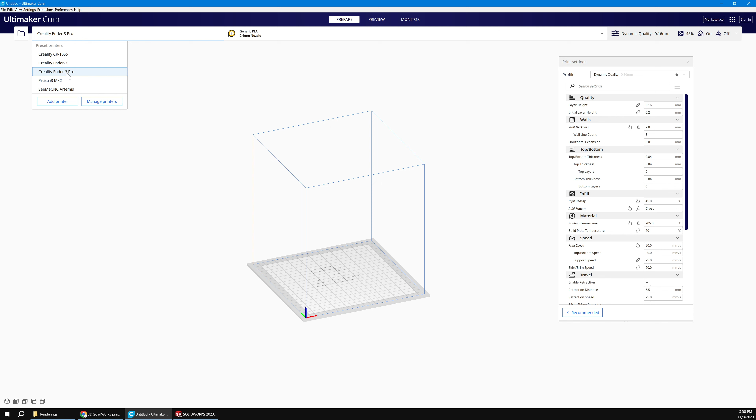What you can do is go and select, make sure you have the right printer, because as you can see here is my Ender 3 Pro, but then here's my Creality, and you can see there's a size difference. So you want to make sure you've got the right one selected.

Now over here you've got basically your profiles and everything that goes through with it. Super fine quality, 0.12, that will take the longest amount of time to print, because it prints the most amount of layers at the finest amount. So if we were to do something, I was to say 0.28, I'm just going to do a quick sketch here.

Imagine the thickest one, which is the fastest, is because it is laying down a thicker bead of plastic and layering it each time. Wherein if I go for the super fine quality, 0.12 millimeters, each bead is exactly that, so the gaps are smaller. You can kind of see here as a comparison, it does more layers, which allows it to give a smoother finish, as well as better details.

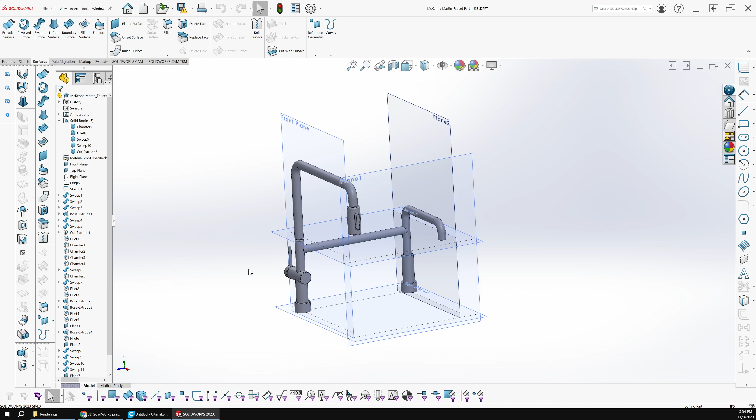Now what we're going to do is export this out. You need to export it as an STL file. So we're going to come here and go File, Save As, and we're going to go to STL. What that does is turn it into a mesh, and that's what Ultimaker needs, a surface or mesh file.

So we're just going to go in here, I'm going to go to Options. I want to make sure that when I export it, it's smooth. If I bring it in like this, a circle will be faceted when I print it, which is great if you just want to go quick, but we want a circle to be a circle. So we're going to go with a nice fine one.

Now in this model we have multiple bodies. So I can come in and go, where is it, I want to say I can either save all my components in a single file, and I'll show you what happens. So I'll do this, and we'll save it as a single file. There it tells me we've got it.

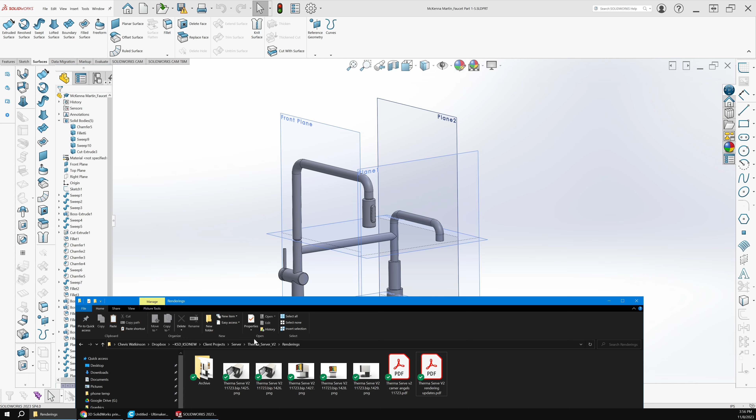Now if I come back here and go to my downloads, you'll see it saved out each individual piece. So we've got that now.

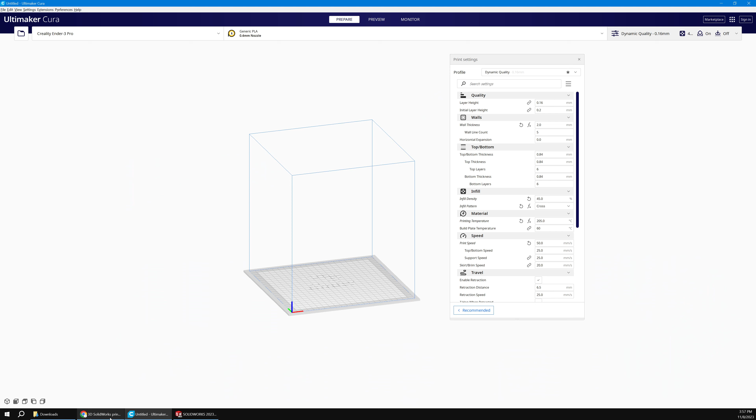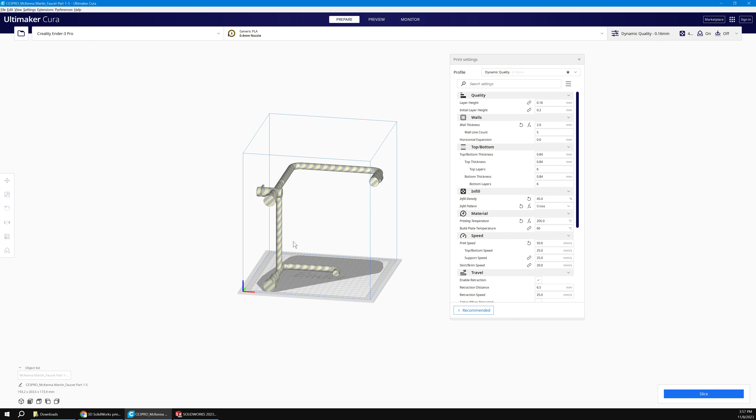So what we can now do is come into Cura, and we can just say open. We'll go to where these are. Now this is where it brought it in as one giant object. The problem is what you're seeing here is that it has these striped lines because it's telling you that it doesn't fit onto the print bed.

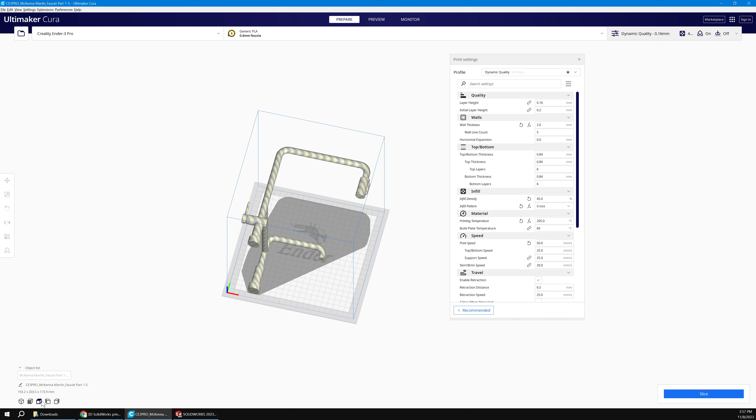Now that's not necessarily a bad thing. But you can see here it doesn't fit. Let's go to a side view. Plenty of room here. So what we want to do is take it and just select it.

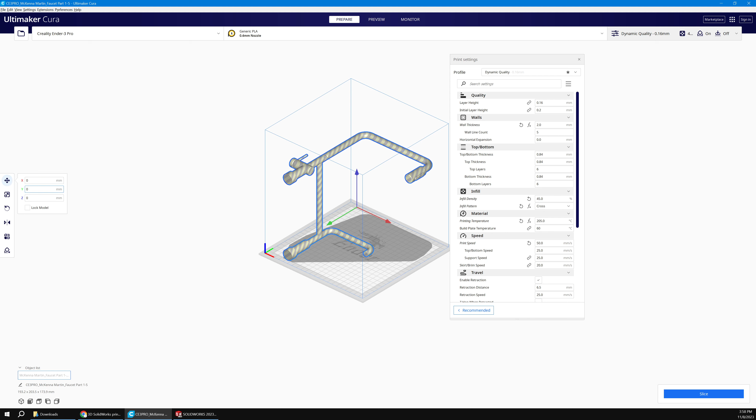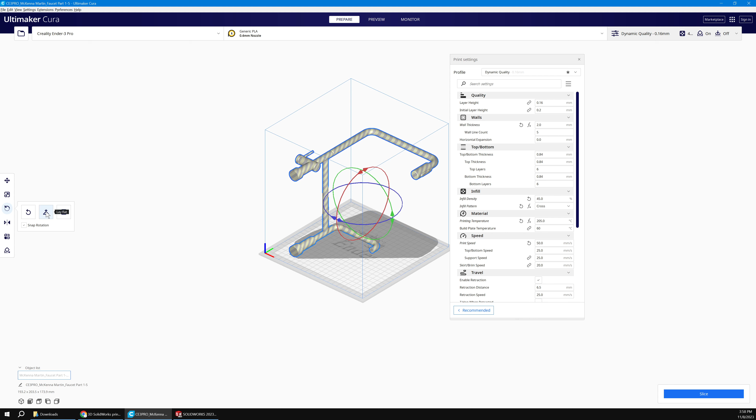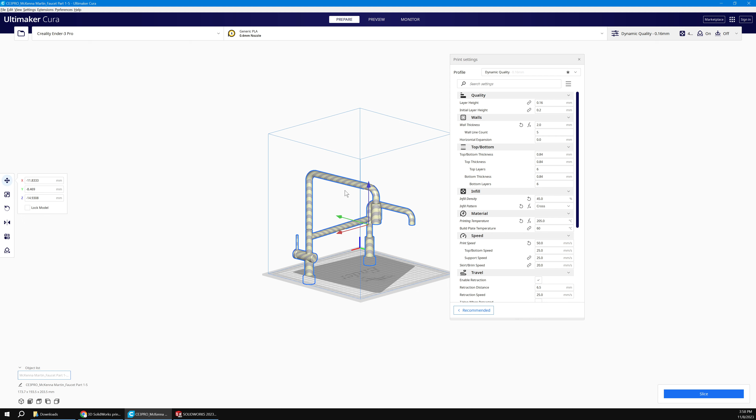Over on the left hand side we have a lot of different options. You can move it around and type in the numbers, or drag it around like this, or we can rotate it. For this we're going to go snap rotation, and I can reset it, grab these and rotate it, or say lay it flat on that face. So if we come in here and go 90 degrees... not quite sure.

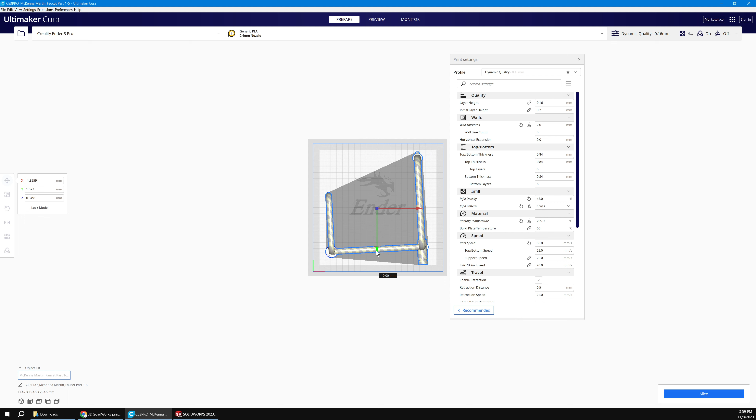There we go. So you can see by moving it around and positioning it, I got it in the right spot so that it fits all within the bed. And I know that because it's yellow.

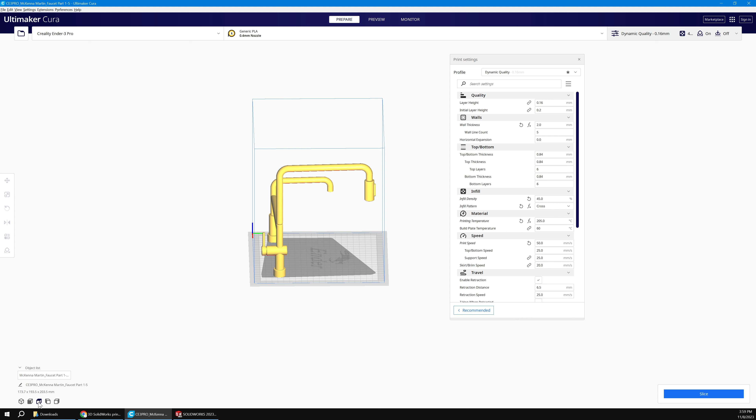Now, here is something to keep in mind when you're doing this and positioning things. You need to have what's called support structure. You can't 3D print something and just have it hanging in space like that. There's nothing for it to print on.

So you need to tell it, hey, let's have support structure. So that's where if we come down and we go to support structure, we want to make sure that we have it turned on.

You see here where I'm having it set is at 50 degrees. So anything that is greater than 50 degrees, I'm saying build support for it. So 90 degrees, obviously. If I was to do 50 degrees, the reason for that is because it's actually able to do it without support for 50 degrees.

If I come back and I go slice, what slicing does is it runs through and creates what's called the G code, which is the file that the 3D printer needs to read. So what this is doing now is going through and taking a look at everything to show what we've got.

Now let's look at this right now. We've got 9 hours, 9 days, 11 hours for this. Let's go to preview.

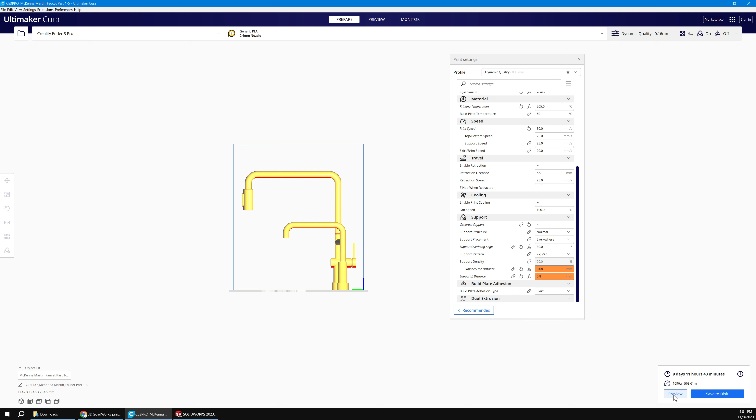There is this much support structure. There's more support structure here than the actual model. So it takes that much time.

Now, we can also come back and say, well, let's just do a standard quality. That's not a bad quality to go with, 0.2. Even 0.28 would be good, but just by doing that, we had 9 days.

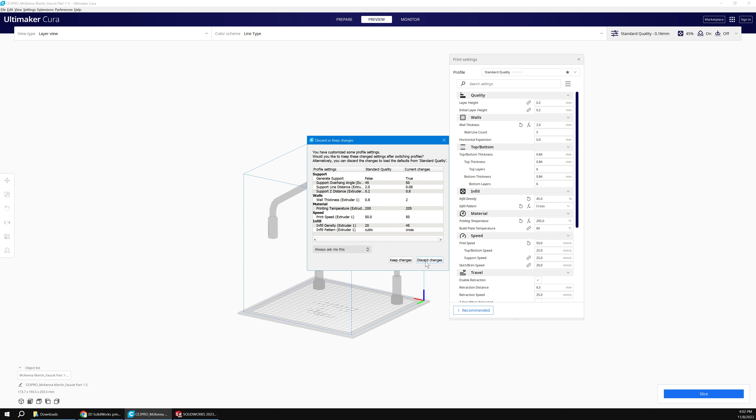Let's go with a slice. We went the wrong way. It went to 10 days. Well, that's just bizarre.

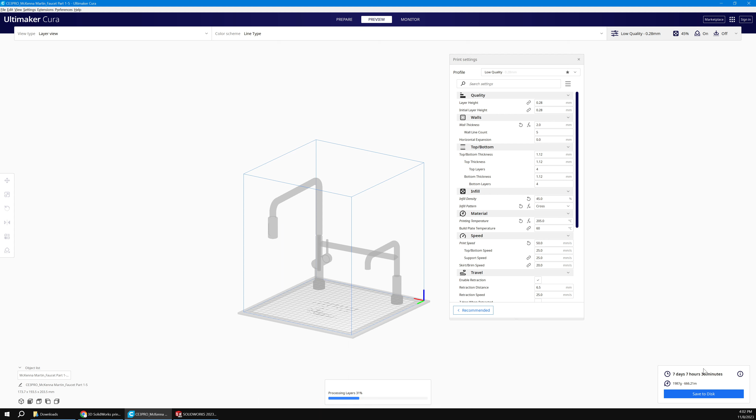Hold on, let's try it again. Okay, so now we're down to 7 days. And a large portion of that is still all this extra material in here.

So this is where we look at it and say, okay, what are the different ways to do it? Because even if this was a reasonable time, let's say 2 days, the chances that maybe halfway through something gets ruined is high. The longer that thing is running, the higher probability that something could go wrong.

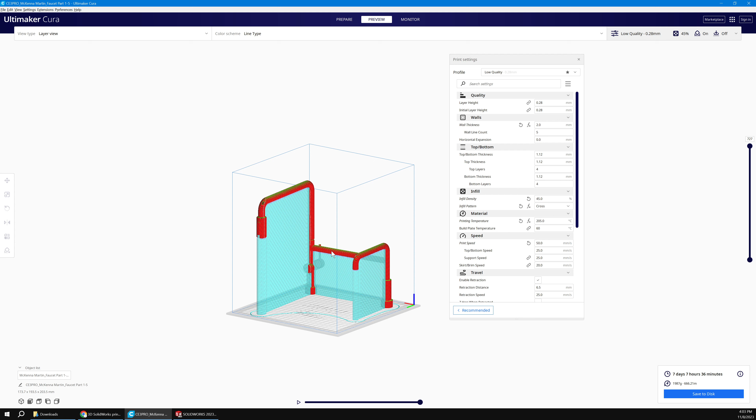So you want to be careful. So that's where you want to look at your model and say, okay, well, in this example, what can we do? What if, how high it is and how much it's printing?

What if we were to come and we're just going to come in here, I'm going to right click. Shoot, I'm not in. I wanted to be in. Okay, hold on.

Fusion 360 is really nice because you can just right click on a body and say export. No, it's not going to let me do that. I want to export just that. Okay, give me a second here.

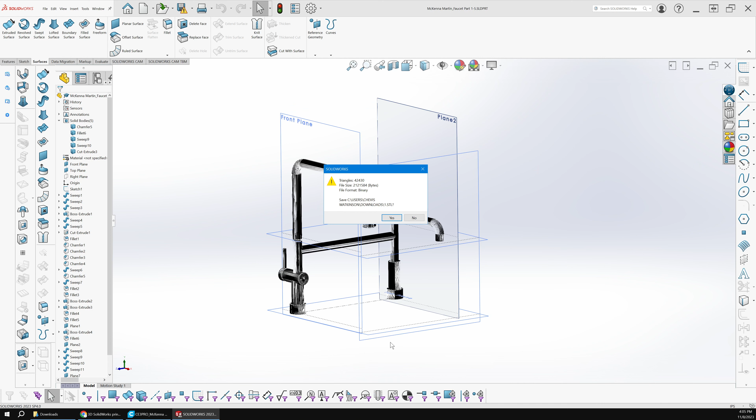Okay, give me a second here while I think, because it's been a while since I've done this. Okay, so I'm gonna cheat here. I want to get these all as individual components. So I'm going to just right click. I'm going to insert into new part. I'll give it a name. Come on.

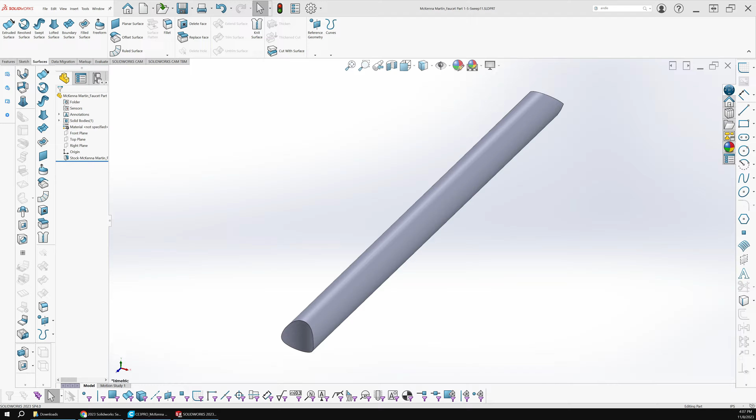Okay, so what I did is through SolidWorks, I went and let me just open it up. I went into the model, and for each one of these objects, I highlighted it, I right-clicked it, and I said insert into new part. What that did is it automatically inserted it in a new part. I was able to save it.

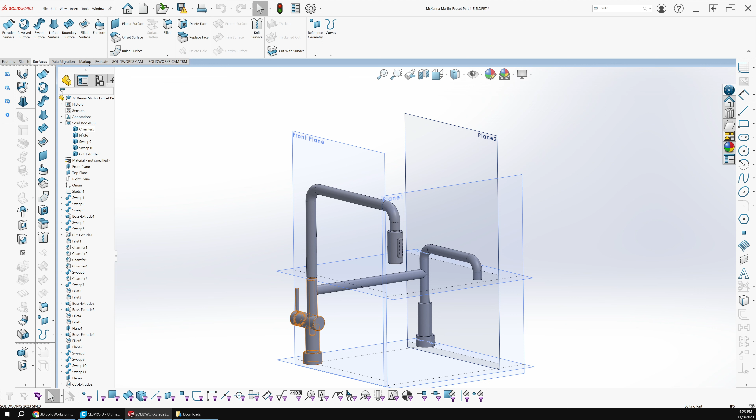And then I'm not sharing my screen. Let me share my screen. So let's go back again. We'll step back here a little bit. So because they're all solid bodies, I could come here, select it, right click, go insert into new part.

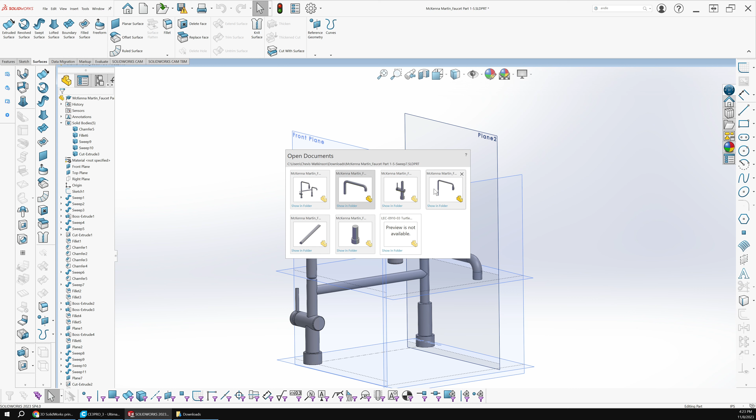What it does is it automatically opens up a new SolidWorks model window, puts it in here, and now we've got a new part. You can see here it says it's stock. What this allows me now to do is I can go in and save out just this one piece as an STL.

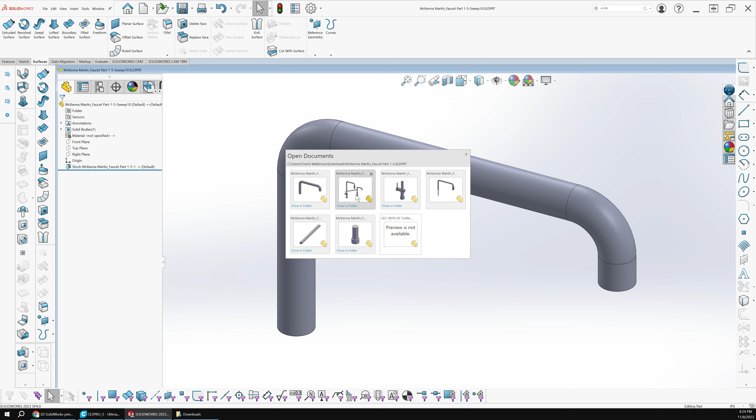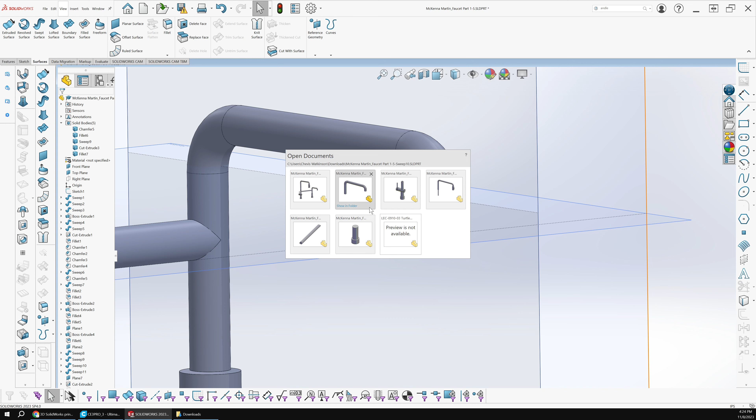Versus where I was struggling before with the workflow of trying to save out individual components within there. Now, the one thing though is if I come back to this model, and this is where when we start building assemblies, I'll show you a little bit more about it. But if I come in here and I edit this part, if I go to that part now, it updates. So there's a link.

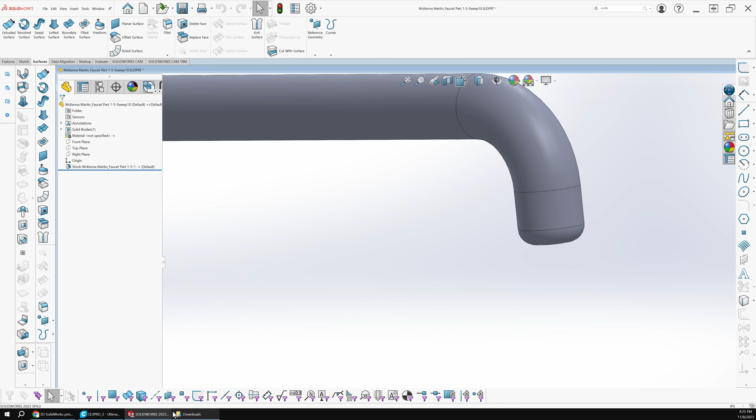Normally what I would then do is drag these all into their own assembly, but we're not going to worry about that for now. So what I then did is, I'm going to just delete all of these because I want to show you first.

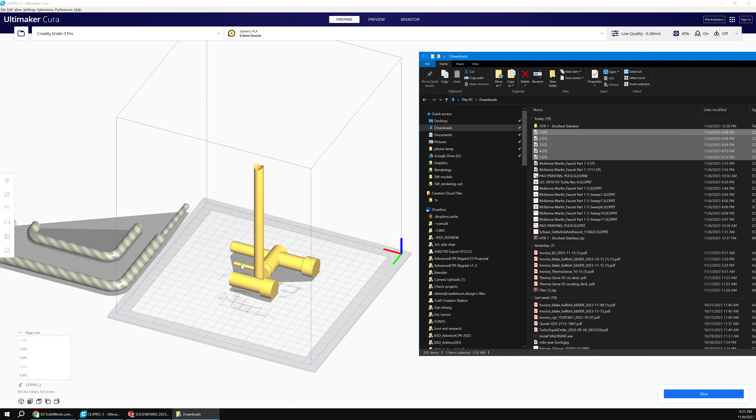What I then did is come in, and I've named them all STLs, just like I did before, and I can just drag and drop them all at once, and they'll go wherever they need to go. You can see these ones obviously can't be printed because they're off the bed, so I'm just going to drag and move them around until I get them to be highlighted yellow. And then same as this, we'll move this one to wherever it needs to be.

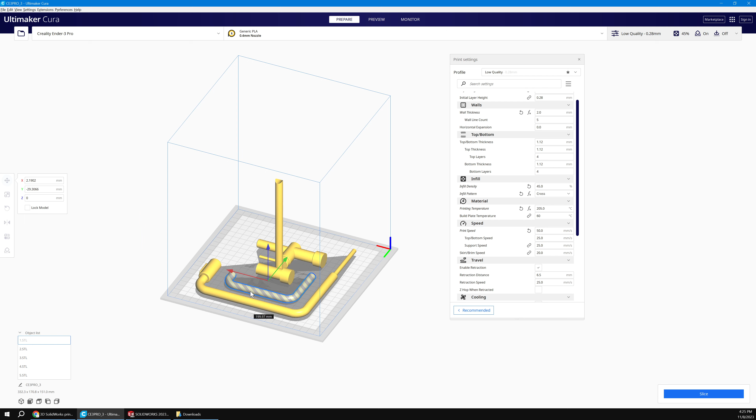So right now we've got everything laid in. That one's vertical for whatever reason. We could rotate that too.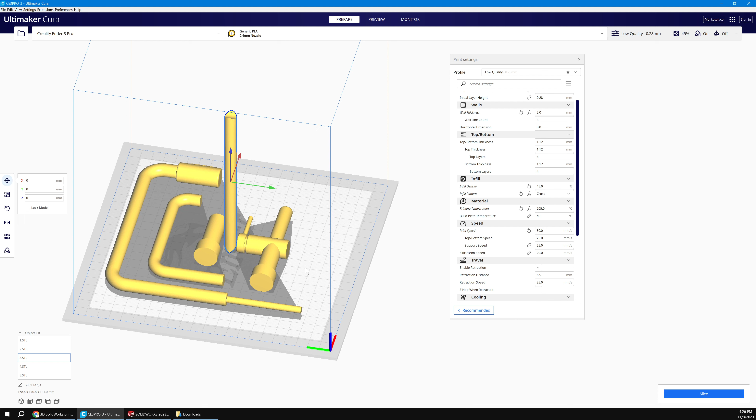Now, here's something for some of your models when you're doing it. The most precise way for it to create a circle is from a top-down view, because it's going to draw that circle and it can go in that rotation, versus doing a circle in this orientation. So from a top view, the circle looks like that.

From an orientation like this, give me a second while I sketch that out. It does a step thing because the 3D printer goes a pass, and then does another pass. So it's not as tight of a tolerance, not as smooth either. I don't think it's going to be an issue for this.

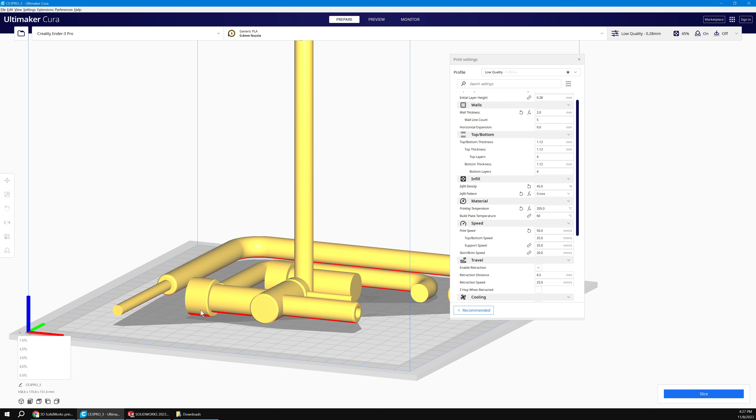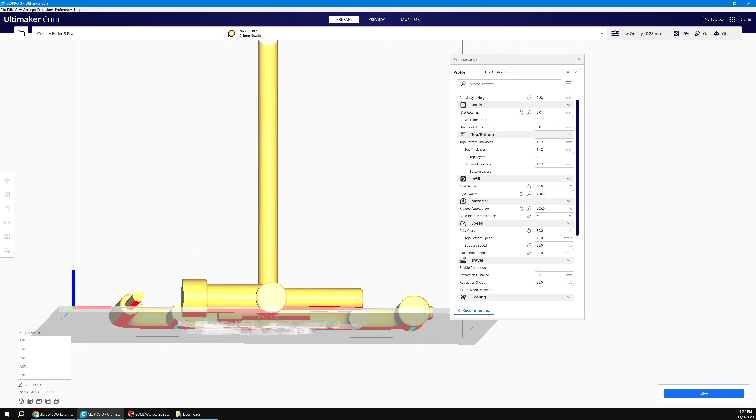But you can see here, let's just look at this orientation. We've still got the exact same amount of mass. We can now rotate things so that they don't use or don't need as much support structure. I still have them slightly raised off the bed. I like to do that because it makes it further cleaner on the edge.

But if I come in now and I go slice, and I haven't really changed anything, it's still low quality, whatever, initial layer height, we're down to 12 hours now. So you can see by removing all that extra filament, we saved a lot of time.

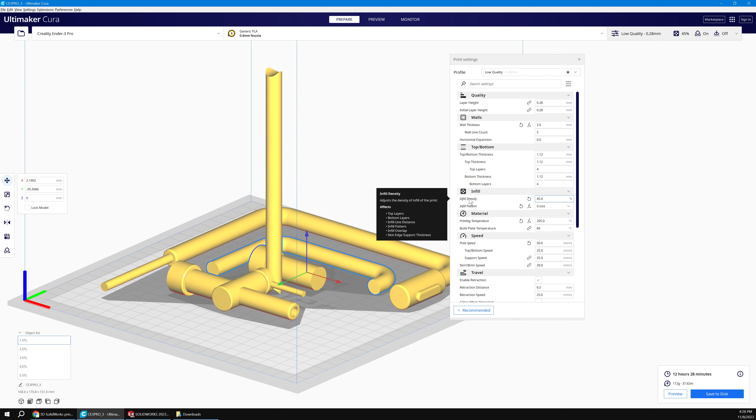Now, I can even go more so if I sit there and say, okay, these are all set to my presettings. Infill. If I come in and I go preview, infill is how much of that internal structure. So this here is a solid bar. And you can see it's put infill in there so that it's not a pure solid bar.

It's only 45% fill. If I came back and said I want that to be 100% for everything, that's the thing, I can't pick one piece and only have it at 50% infill. It's everything on that bed. But here you can see now it's much more solid. But you've added 2 hours to it. So there's give and take.

This is a much stronger piece. It's not going to be as delicate. You can come back and say, you know what, I would be fine with a 30% infill because I'm going to be there to micromanage it and make sure no one touches it.

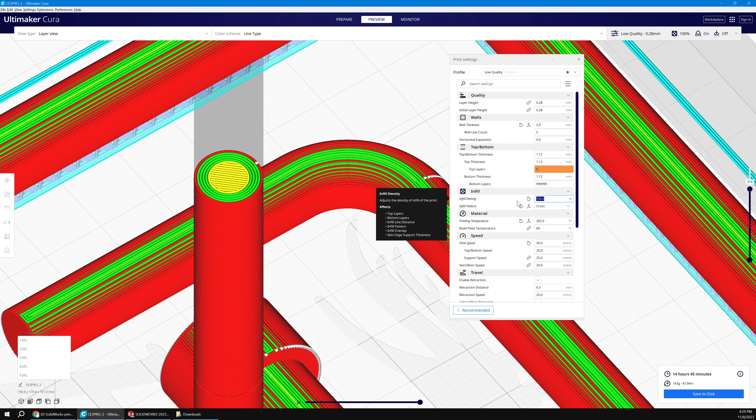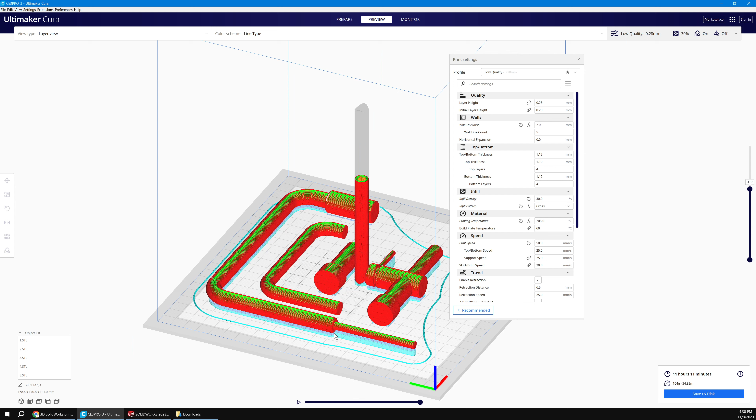We'll get it down to 11 hours. Now, we could also at this point, let's say you wanted this circle to be cleaner and nicer. So that means we need to change the orientation. Well, we can now do that, because before you could only change the orientation one way.

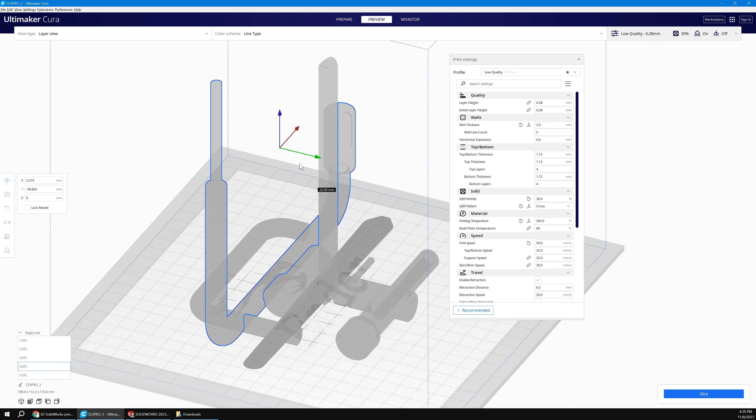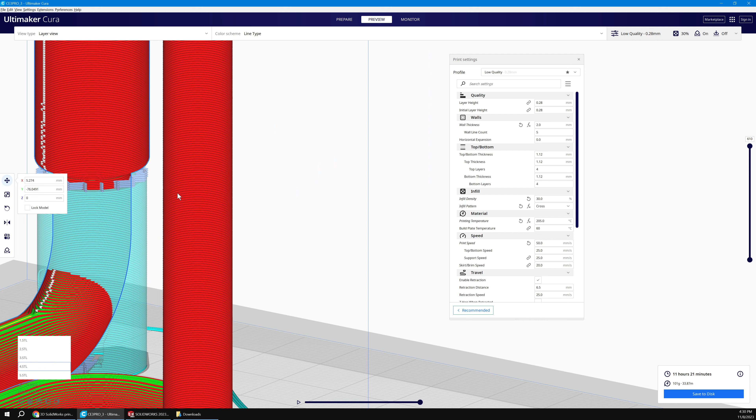But now we can rotate it the opposite way, so we no longer have all that support structure that's needed. We still added some support structure here, in this area, but we're still at 11 hours. And this is going to be much rounder, cleaner, smoother. And you could do that for all of them.

Now, one of the biggest things, how many of you have 3D printed something and have had a nightmare of a time getting your support structures off? Okay.

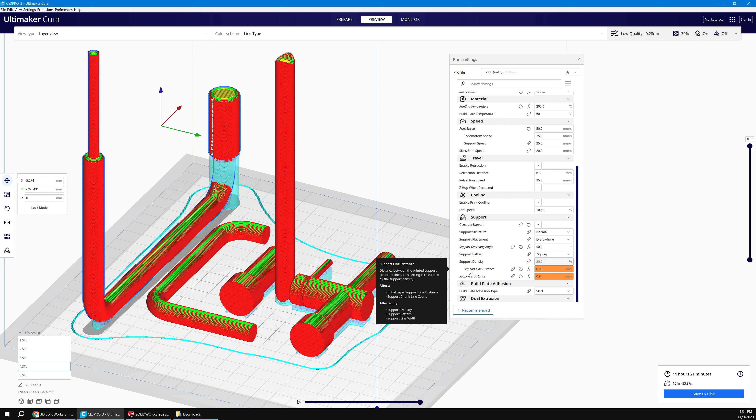So under support structure, there is support line distance. What that basically is, is the distance from the actual printed part to the support structure. If that is at, let's say, 0.1, no, that's not what I want. There.

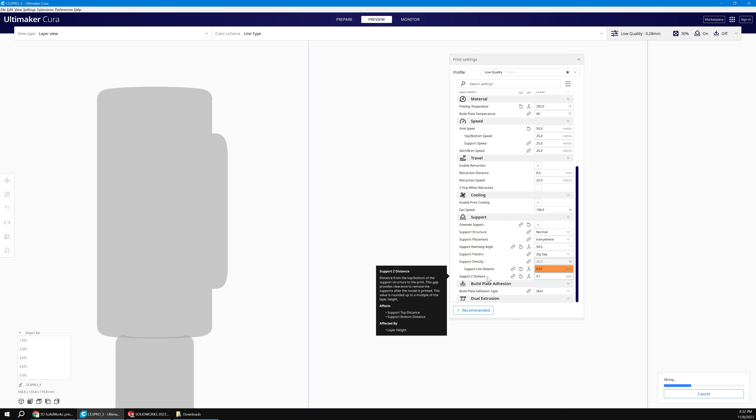It's literally going to be attached to it, and it's going to be very rigid, very hard to get off. You're going to have to crank on it, dig and pull away.

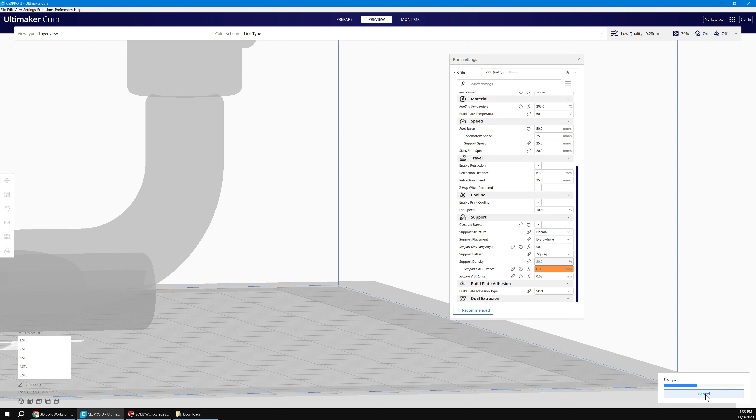So what I'd recommend is you make sure that number is set right, both at 0.08. That's what I find gives the right distance, on my machines at least, to get the right amount of support, but I can still grab an edge and the whole thing comes off at once. So pay attention. I don't know what your default settings are, but that's one thing you want to check and make sure of.

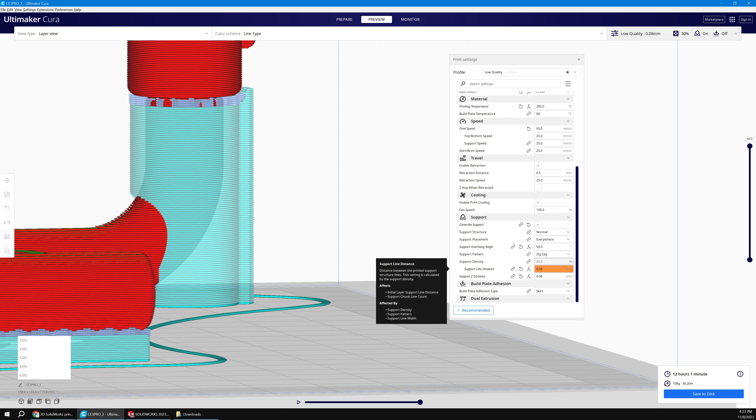Yes, Carmen? Did you say 0.8 or 0.08? 0.08. Okay, thank you. Yep.

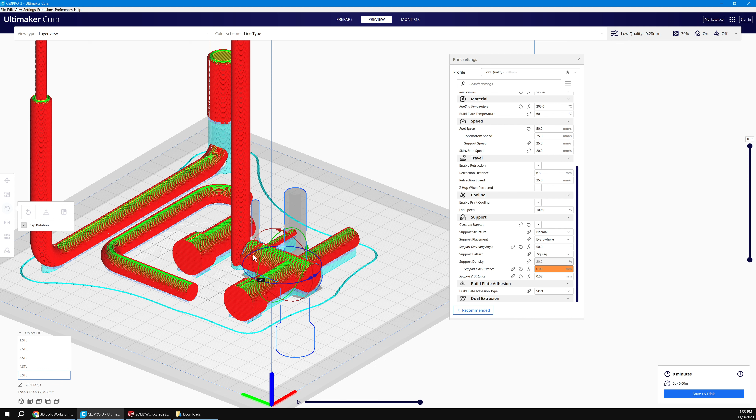It's a matter of just playing with all of these and getting them set up the way you want, finding that balance. So like here, we're going to get a nicer print for some of it, but now we're adding back in additional support structure.

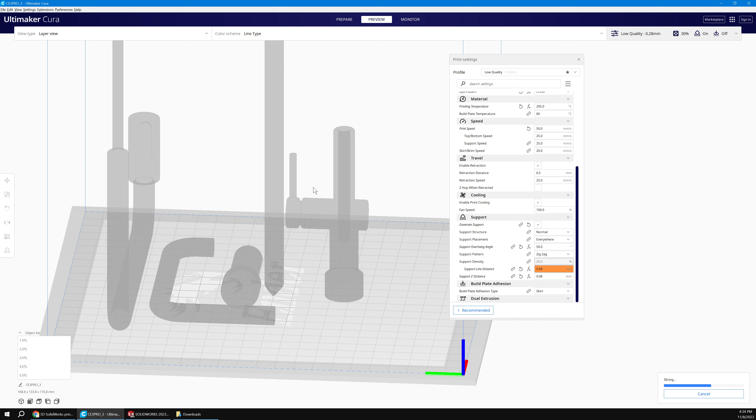We'll see who the geeks are. Does it need to be super fine detail like that? Or can I get away with something that is rougher and not as perfect? What do I need? Because that's going to make a big difference.

I used to see students sitting there printing a part that was going to take 12 hours, and actually it took 24 because the first one didn't work. I asked, do you need this to be a super fine finish? Are you painting it? He said no, I just need something to hold in my hand. I said, well, then drop it down. And we got from a 12-hour print down to a 2.5-hour print. So we really want to pay attention to that.

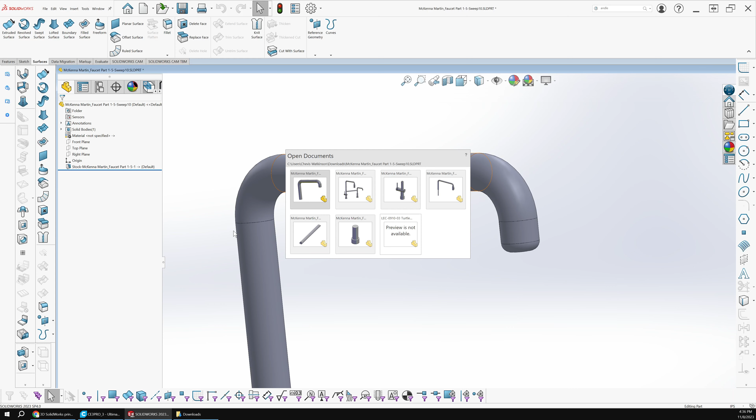What McKenna did is she wanted to be able to have this post spin, so everything else gets glued together. And you can see we went from printing this as a ridiculous 10-day print to 10 hours, and then maybe 3 or 4 hours of putting it together.

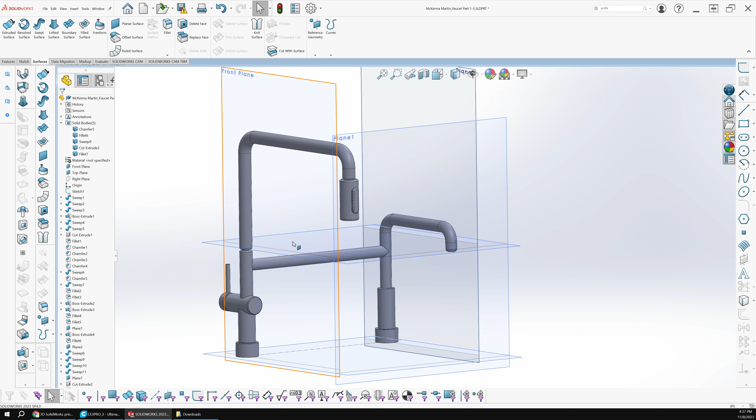So she also went in and modified her model. Let me just do a cross section. I don't think you ever needed this long of a post. You could probably save time printing this, McKenna. You probably only need it down to about here, just so you know. But now this will drop in and she'll be able to pivot and rotate it.

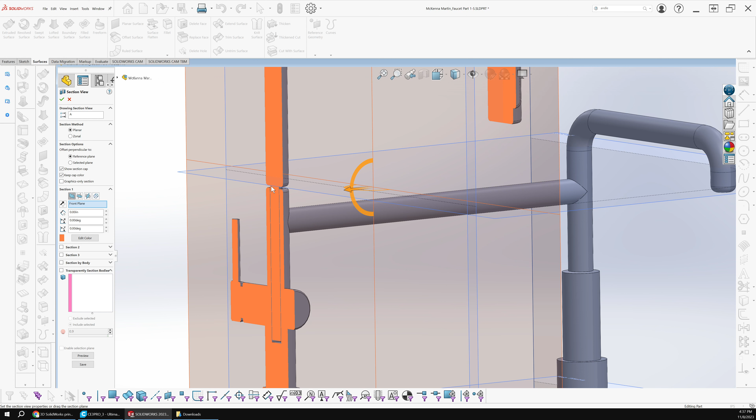What she also did was leave a gap here because there are tolerances. If she had extruded this all the way down to the bottom, these don't print 1-to-1, there are different tolerances, so it might not have fit properly. She also left some clearance holes or gap clearance here because it has to go in and spin.

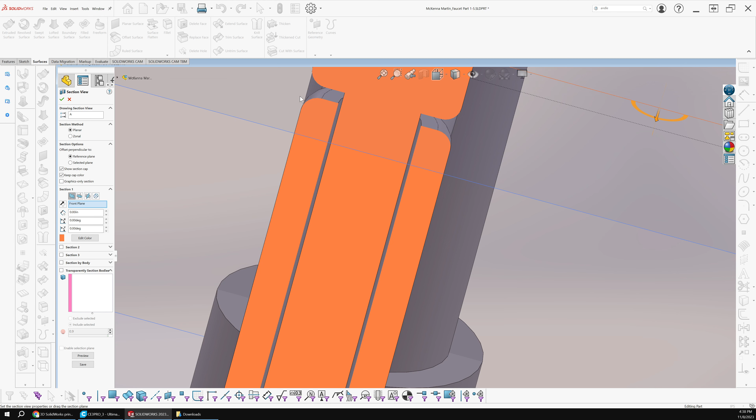Now this gap might be a little too much, McKenna, because there might be a bit of wobble in it, but that can also be fixed very easily, and this is prototyping. If it goes in and it's a little sloppy, you don't reprint it. You grab a napkin or something thin to wrap around it. You also might want to put a little grease in there because plastic on plastic won't give you that nice smooth rotation. So by tightening that up, it's no longer just flopping, and with a little grease, it's nice, versus spinning it and it goes clunk, clunk, clunk. You want that, ooh, that's nice.

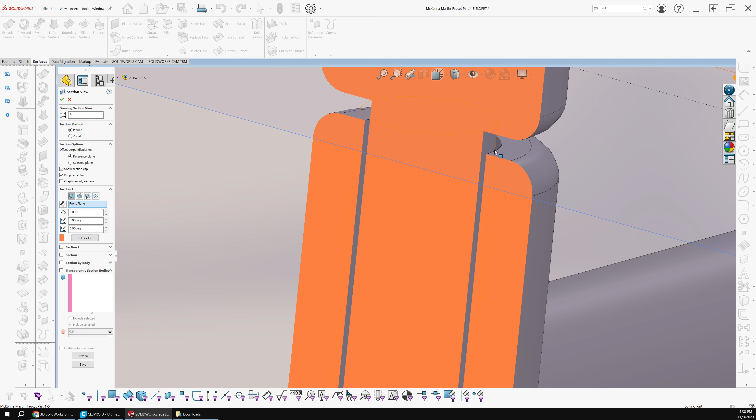Questions? Is this useful?

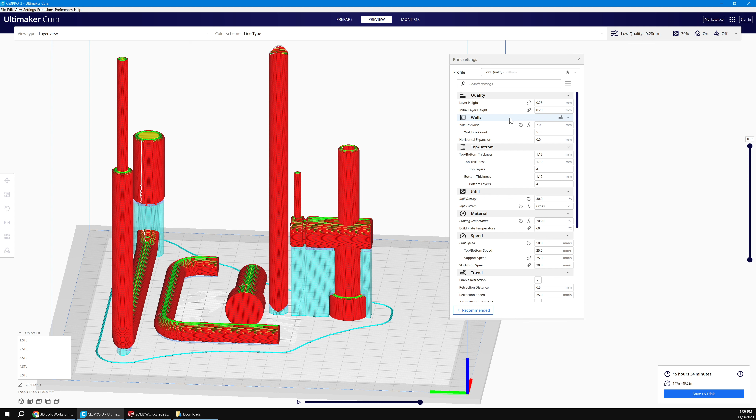If your filament isn't sticking, you can use a glue stick to make that better.